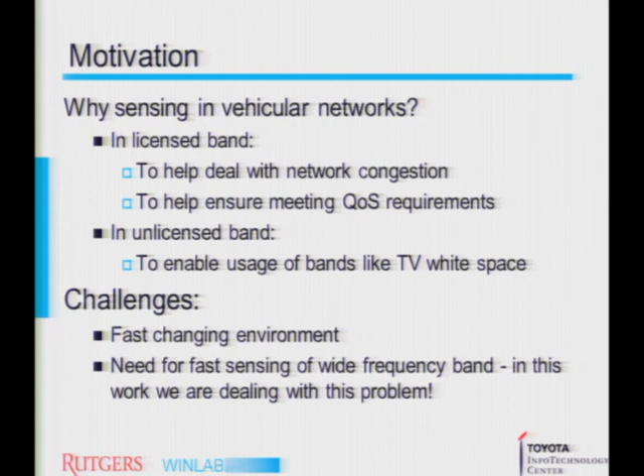Okay, I would agree. We did stay in a bit abstract world, in the sense of not actually exploring the exact numbers, because we were hoping that Theodore would be the one who would give us the application requirements. Even for probability of false alarm, we could not come up with a feasible agreement on what would be the good ones. So at some point you have some slides which talk about some numbers. Yes, that I remember. Why don't you go on, because otherwise we'll miss the deadlines.

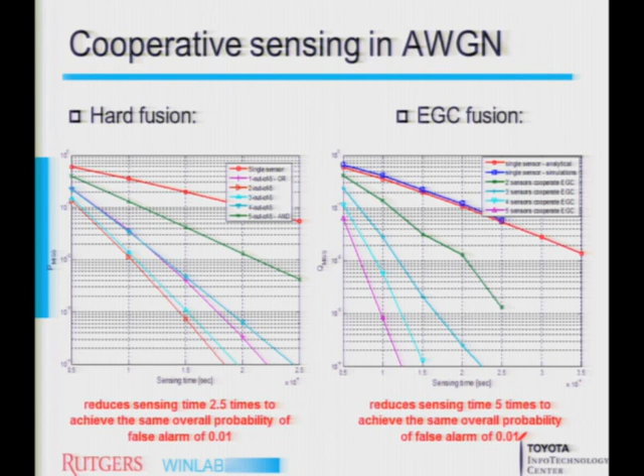So, how would these simple cooperative techniques, hard fusion and equal gain combining, work if we only had AWGN? It has been shown, and we confirmed here, that even in noise only, without any fading, fusion brings benefits. For hard fusion, switching from single sensor to 2 out of 5, the red one, would be the best for these settings. And for equal gain combining, increasing the number of sensors in a noise-only environment brings better performance.

What was that? Was that a fading channel? No, there was only noise. Okay, so no fading at all. So how do you explain that 2 out of 5 is the best one? We did not actually come up with an explanation, but in the setting, which was 200 milliwatts, 20 meter distance or similar, assuming only noise, it just came up to that one. We did not actually explore why 2 out of 5 would be that one.

Okay, after showing how it works in noise only, we used an example of a vehicular environment channel derived in the work that we reference here. It's a double slope channel model with a cutoff distance of 100 meters. There are plenty of vehicular channels derived in different ways. We liked this one because it was derived experimentally by having two cars running around different neighborhoods in different settings, and for a constantly present signal, which was our assumption as well. So that's why we went with this model.

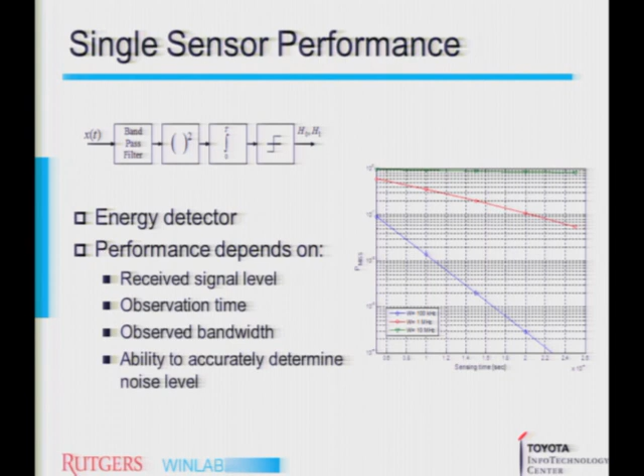So there's some fading models in this. Yeah, he just described. This is the fading model. So we use a dual slope channel. It's called Nakagami fading. It's a 2-parameter fading model. So, but somehow you have to normalize the joint threshold to the observed SNRs.

If you have severe fading, you have more noise in the integral. So somehow you have to give weights to each. If you're taking a new threshold, you just don't sum them up. Have some W1 S1, W2 S2, right? In equal gain combining, these weights are 1. So it's the simplest, instead of measuring SNR and then putting weights on it. We wanted to be faster: instead of estimating SNR, just send the value and let's see how much it gains.

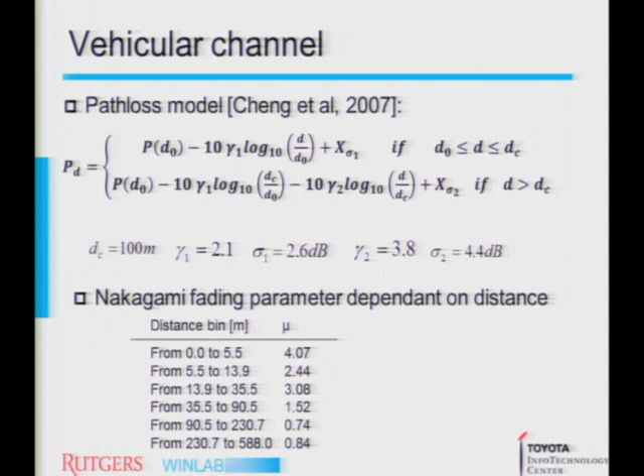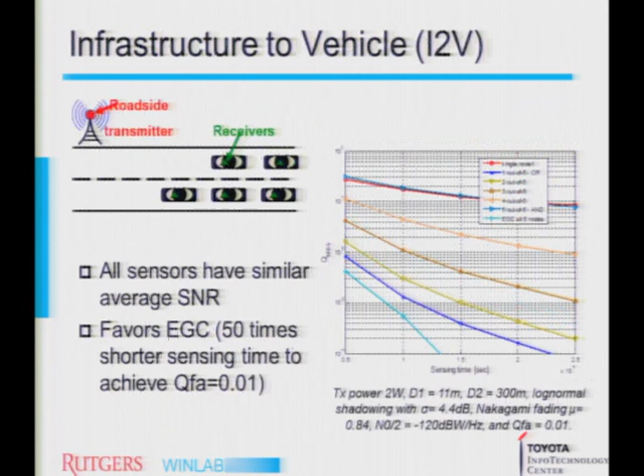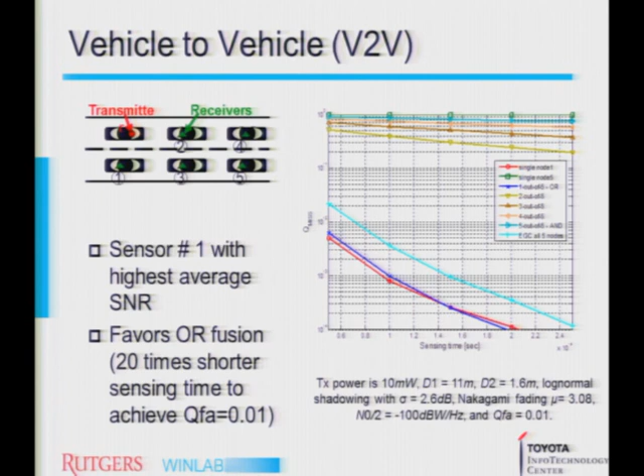The results of this work: we wanted to show the balance that's needed for fast sensing of wideband. Since we saw that sensing a large bandwidth in a single sensor introduces more delay, if we employ cooperative sensing, we show that different topologies favor different fusion techniques, but the overall conclusion is that the OR technique would be a good alternative as an overall fusion technique for vehicular environments.

Okay, do you have any questions for the first part? Or skip to the second? So for the EGC, you need these energy values from all the cars and have them together. Yes. How much data is that?

How much data? There is actually work where they suggested having a level and looked at how many bits it actually takes, and how much you lose if you decrease the number of bits. So instead of sending 8 bits, decrease to 3. And they showed that 3 bits is perfectly enough. For the EGC? Yes. So 3 bits per car. And we say OR is a good alternative. It's 1 bit only. Why do I care about 1 bit versus 3 bits?

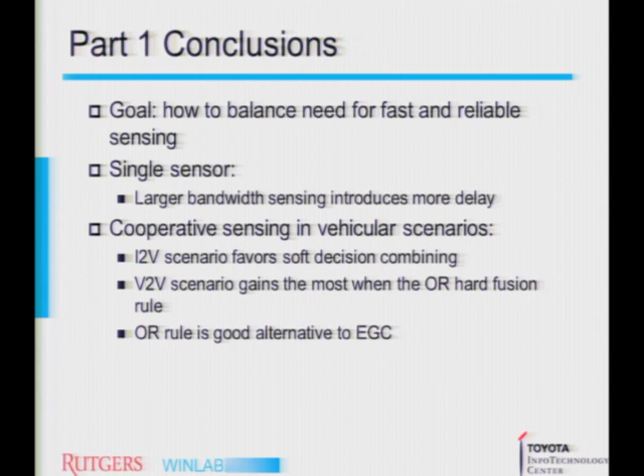For each packet that you send, you have some 50, 100 byte overhead. And then you add in the 3 bits. 50 bytes plus 1 bit. I don't like that overhead. You should invent things without that much overhead. You want to send 3 bits and you send 100 bytes of overhead. Okay, let's move on.

So we have about 15 more minutes. Wow. Okay, I'll be that fast. Actually, I expect the first part to be really fast. The second part is way more interesting. So convince us in 15 minutes that you did something. I'll be really fast.

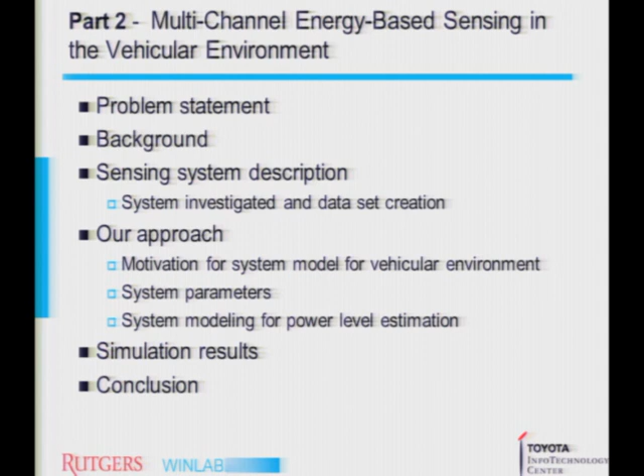So looking at this cooperative scheme and knowing the performance of a single channel, now we say, let's look at the example. Let's look at what the signal actually looks like in the vehicular environment. And looking at it, there is the important notion of changing power level over time due to mobility, whether it's the sensor, transmitter, or the reflectors in between. So, looking at it, we said, let's try to come up with a sensing algorithm which would incorporate the inherent property of the vehicular environment that the received signal power changes.

And what we want to give as an output would be a spectrum activity vector, which would describe subband activity, where zero says the subband is free and 1 is occupied. And of course the challenge is how to find it if the noise and received power levels are not known, and due to the changes in time. So here's an example, a BPSK signal: because sensors and transmitters moved or reflectors moved, the occupancy vector didn't change, but the power level did change. So we want to look into this problem.

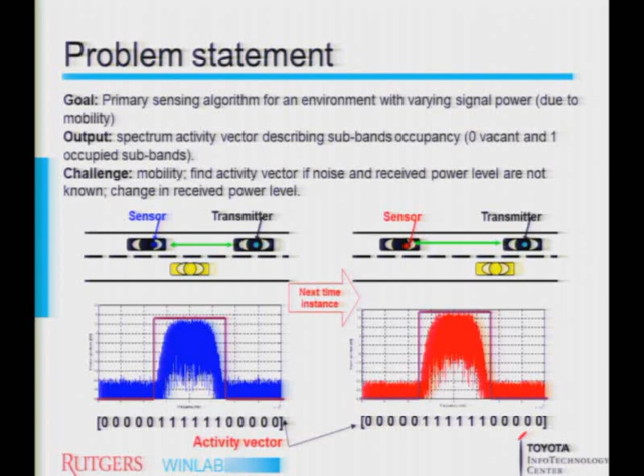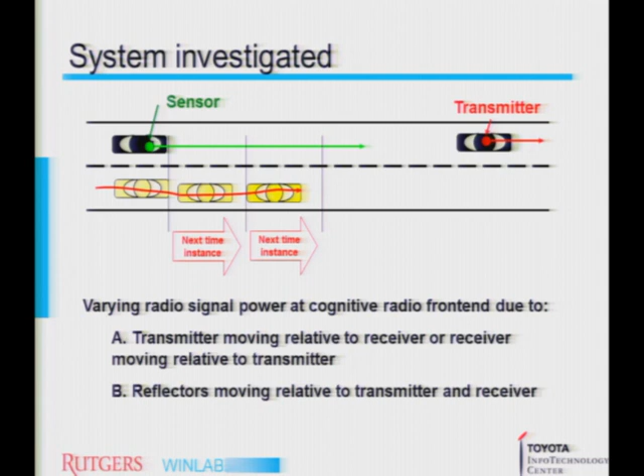So we're saying we have varying signal power at the cognitive radio front end, and it's due to the fact that either the transmitter is moving or the receiver is moving, or the reflectors are moving along the path. So our goal is to have a low complexity algorithm. We do not want to exploit certain signal properties, so we're going with the energy detector again. We want to incorporate in our model power level variability, and we want to use maximum likelihood.

The system would be applied for any vehicular environment, and since we would be applying maximum likelihood detection for a system where the values of all activity vectors will be equally probable, this kind of work would give an assessment of how any other technique would perform in a mobile environment.

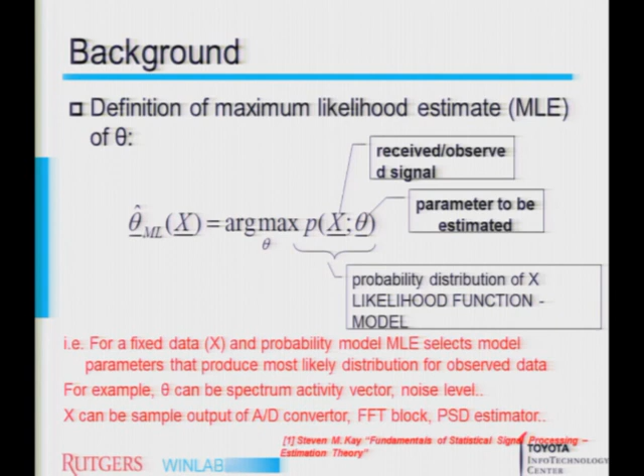So, looking at maximum likelihood estimation, just quick background: having certain observations and the parameter that we want to observe, we are maximizing the likelihood function, which is actually the system model, and the argument of the parameter which gives the maximum of the likelihood function will be the one that we say is in place. Maximum likelihood is widely used in different applications. It's mathematically efficient. It minimizes the overall probability of error when channel occupancy is detected,

and has numerous applications. I think you can skip this. Yeah.

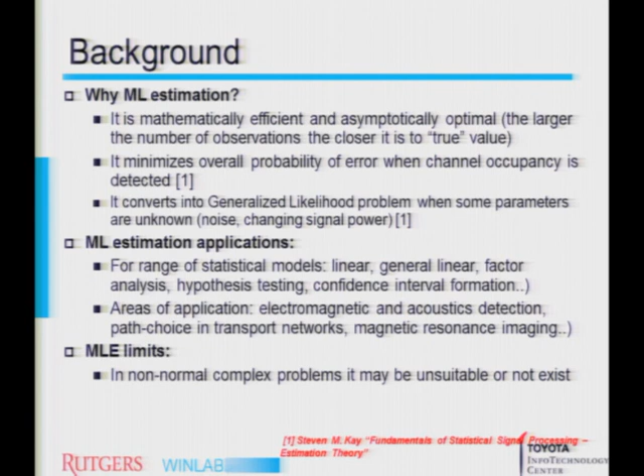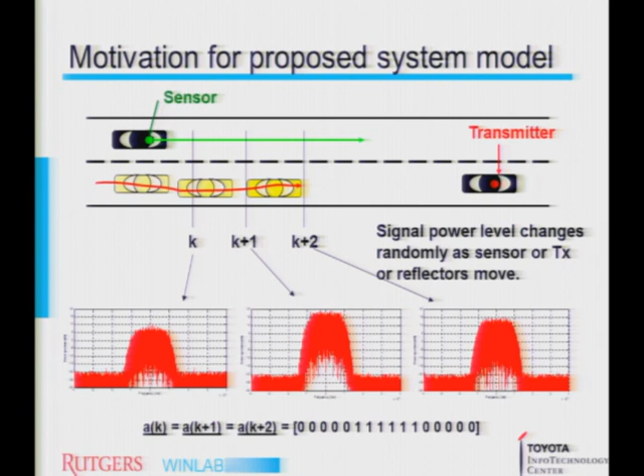So, motivation: again, as the environment changes, the signal power changes randomly. So we want to model this randomness of change. And we're going to be looking at the system, assuming that for different time instances, as the environment is changing, this factor is not going to change, and we will be looking at the system parameters which would affect the overall performance.

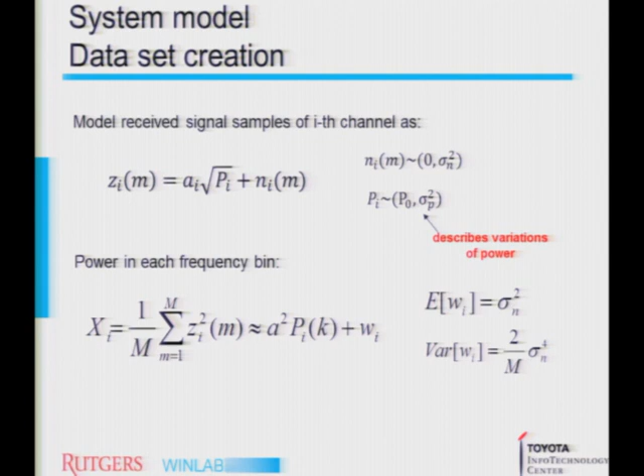Now, for each bin, we repeated capital K time instances in the subsequent time instances. So our goal is to have the frequency bin calculated at one time instance, next, and then capital K times. Capital K would correlate to overall sensing time, because it actually determines what the sensing time would be in this relation. So sensing time divided by M times the sampling time.

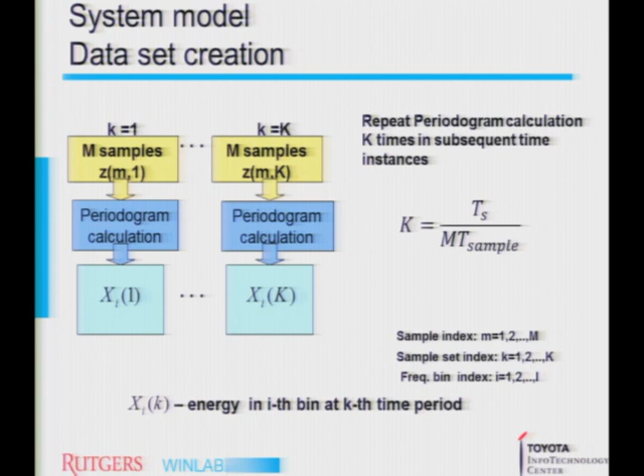Overall, the goal was, for each time instance, to create a vector which would describe power levels for each frequency bin, and then repeat it over time instances. So this kind of matrix would be the data set that we were beginning to work with.

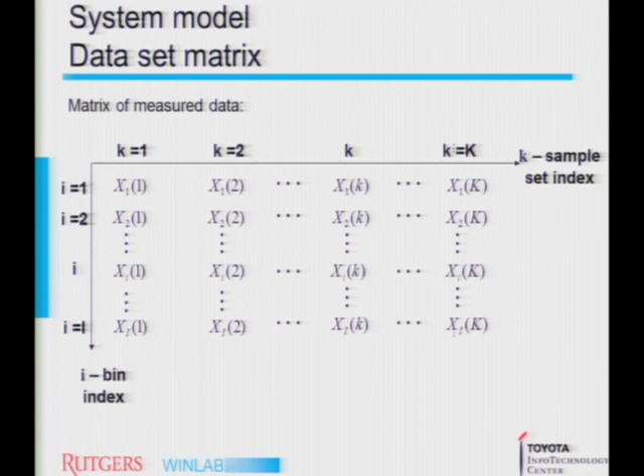So now, in order to propose a system that we're using for detection of the activity vector, we go with some assumptions. We say that we're observing a certain number of channels over a certain number of sample sets, so we know what K and capital I are, and we say that each sample set has capital M received samples in Gaussian noise, and the activity vector doesn't change over time.

So we assume that, which is a pretty reasonable assumption, because if we assume that overall sensing time is very short, the activity vector will not be changing, especially for the examples that we're using later on, which will be a TV signal.

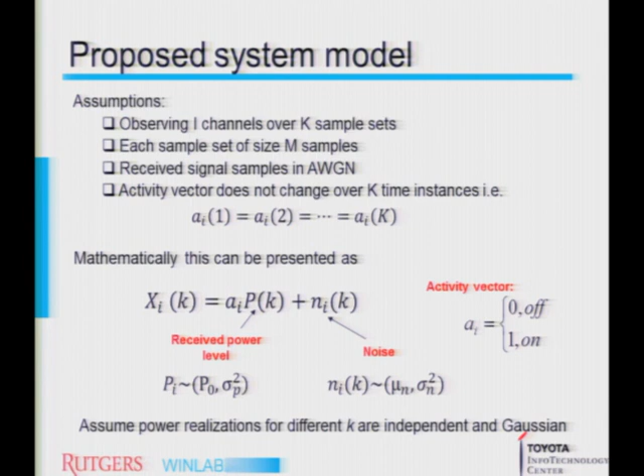So what we are saying is, mathematically, what was received can be modeled as some power times activity and some noise. For the received power, we assume that it has a certain known average power level and power variance. Also, for the power realizations, we assume that for each k, they are independent and Gaussian. So each realization is.

So now having this matrix, we did not employ a complex approach for using this power variance. We thought let's just average, assuming that we incorporated it into our calculation. Let's average over all time instances, and for each frequency bin, it would come to a model like this, where again we have a power with a slightly different variance than before, averaging over K time instances, and the new noise.

Then we say, let's switch this to vector notation, because we have multiple values of frequency bins. So we use this vector notation, where this will be the vector of observations of data, this will be the vector of activity, and then the activity vector would actually turn into a diagonal matrix, and then Q would be the power levels that we're seeing.

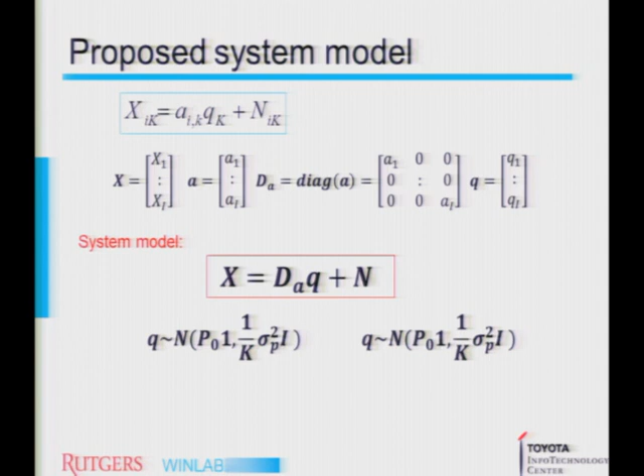Having this model, first we were thinking it's going to be a little bit complicated, but then it actually came down to a pretty feasible, mathematically feasible model, which we then wanted to break down by our system parameters. So assuming that our fading is frequency selective, for this model, we're looking for the conditional expectation of observations depending on the activity vector.

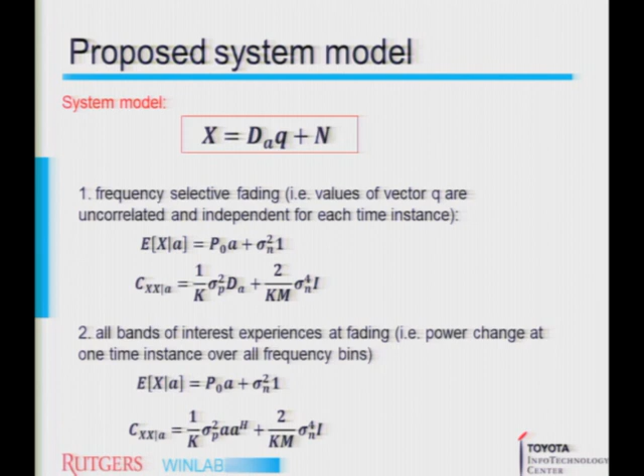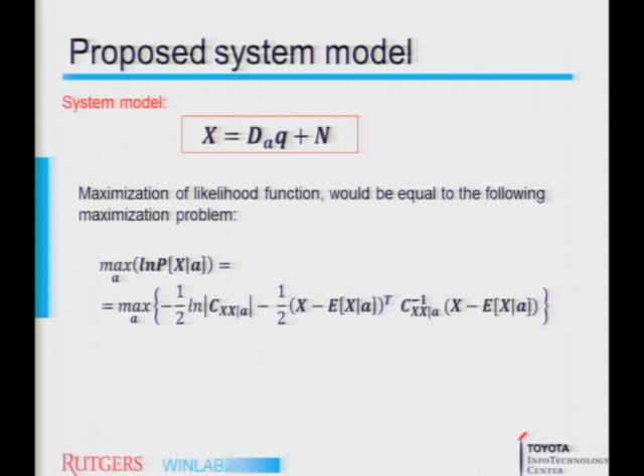So we derive these expectations of covariance matrices for cases when the fading is selective and when fading is flat. Overall, this maximum likelihood problem translates into this maximization problem, where we actually have this multivariate Gaussian to be maximized over all the values of the activity vector.

So looking at the examples, we said we're using an example of sensing 3 adjacent channels of NTSC TV spectrum, from 590 to 608 megahertz. And first, what we wanted to show is how this maximum likelihood algorithm would perform in a static case, assuming that there are no power changes over time. So this would be the performance for a 1 kilowatt transmitter, certain noise level, and the range of sensing times at 10 kilometer distance, and with this attenuation.

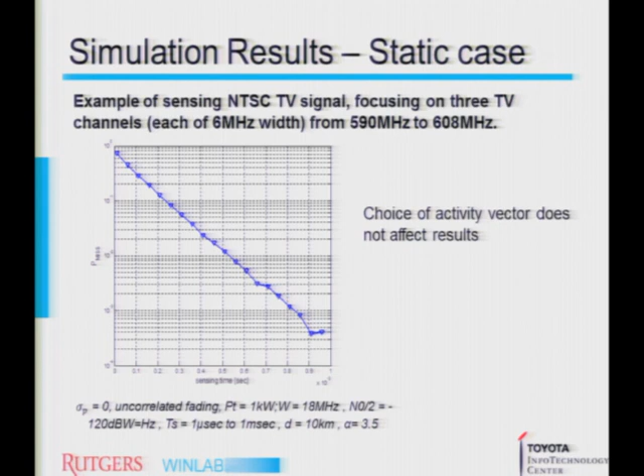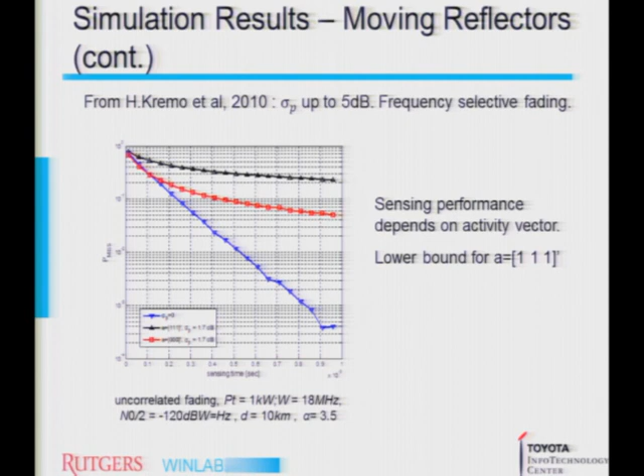So in the future simulations, we use that value for activity vector to get us a lower bound of normal performance. Now knowing that we have mobility, we have power change, we have value of the vector.

We want to look at the performance depending on the nature of the fading. So two extreme cases: one would be flat fading and another one would be frequency selective fading. Looking at it, frequency selective fading would be the one performing worse. So in the future simulations, to get a lower bound, we're going to be focusing on the frequency selective fading.

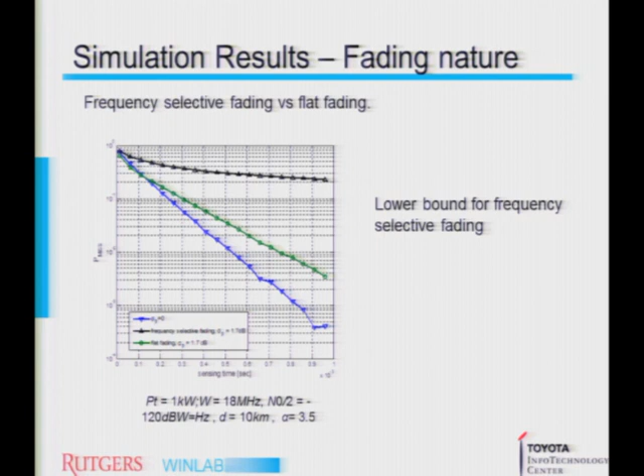Now, having this setting, we wanted to translate this into speed of the sensor. Knowing relative sensor speed would be a little rougher assumption. But assuming that we do know what the speed is, for this setting where we know the carrier frequency and the speed, we can calculate the sensing time by multiplying the coherence time and a certain number of K instances.

So the coherence time determines when we assume the signal is constant, and then how many times we repeat that measurement gives the overall sensing time. So translating this velocity into probability of miss, as the vehicle velocity increases, coherence time decreases, and overall sensing time decreases. Because we fixed K in this case, probability of miss overall increases with the sensor velocity.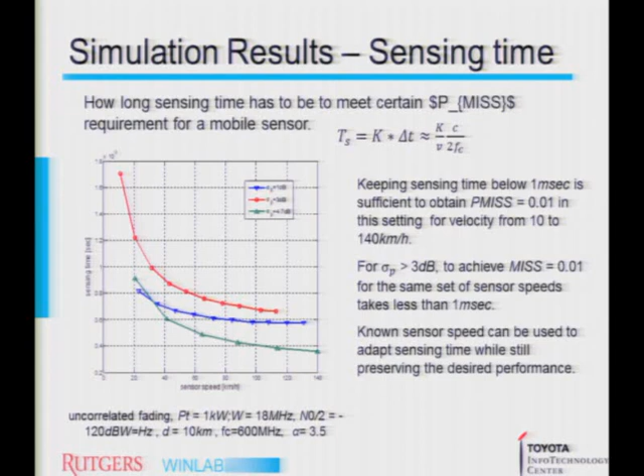In that sense, knowing sensor speed and the performance we want to achieve, we can use it to tweak the algorithm: having this huge chunk of data measured, how we should split it into how many time instance periods to get better performance. And that was the main point of this second part.

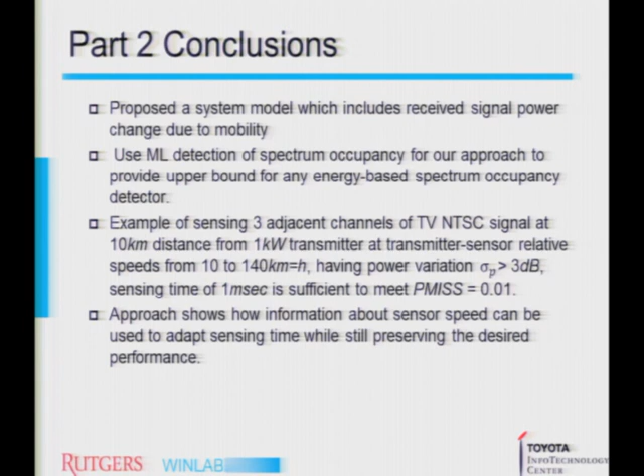We proposed a system model, used maximum likelihood detection to examine its performance, used an example of 3 adjacent channels of NTSC signal, and showed how the sensor speed information can be used to adapt the algorithm to gain better performance without changing anything else.

So, do you have any questions?